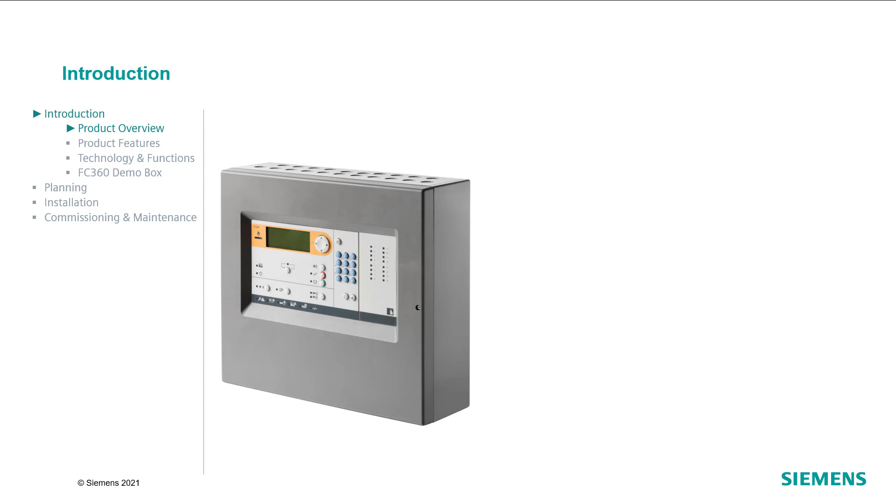The Cerberus Fit portfolio offers the earliest possible and most reliable detection and evacuation with clear voice messages. The commissioning as well as the operation of the fire panel are easy and can be performed without an extensive training. The Cerberus Fit portfolio offers several detector types for a wide range of applications, from standard rooms to harsh environments and sensitive zones. At the same time, it ensures business continuity.

The Cerberus Fit panel is available as FC361 standalone fire control panel with 1 loop or 2 stubs and can handle up to 126 devices. It comes with 3 relay outputs, 2 monitored sounder lines, and 4 freely configurable I/Os. There are 2 housing variants, Compact or Comfort.

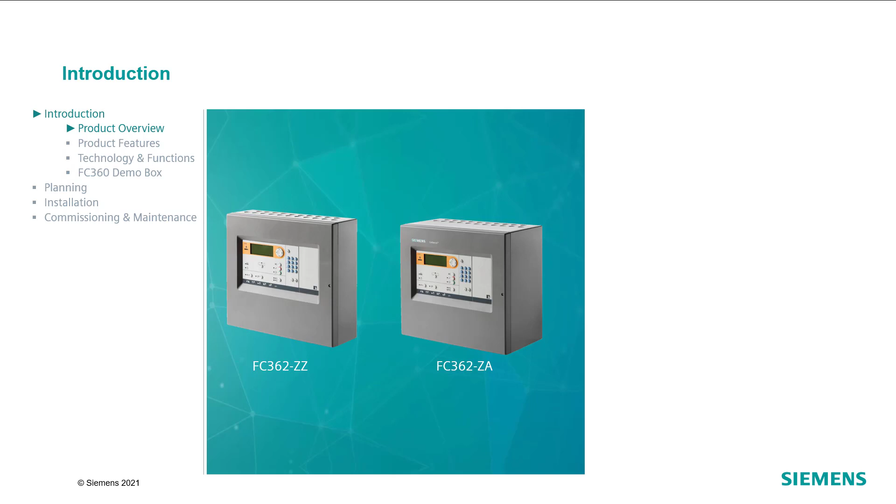The FC362 standalone fire control panel is suitable for customer sites with more devices and offers 2 loops or 4 stubs and up to 252 devices. It also comes with 3 relay outputs, 2 monitored sounder lines, and 4 freely configurable I/Os. It is also available in the Compact or Comfort housing.

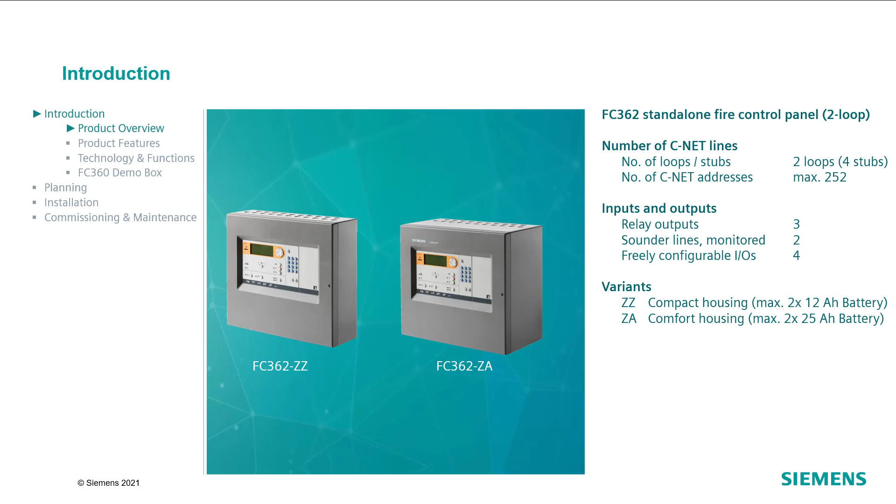The panel functions can be extended with the following accessories. The 32 zones LED indicator fits into the operation terminal of the fire panel. It indicates immediately which zone is in alarm state. The evacuation module NL provides a special Dutch function. It activates all alarm devices by pressing the start button twice and deactivates these devices by pressing the stop button twice. The key switch and key switch Nordic are used to log into the panel with access level 2 by using a key.

The output card 4M offers 4 monitored outputs which can be used for remote transmission or conventional sounder lines. 24-volt power is required and can be provided either by the internal power supply or by an external power supply. The FCA 2001 RS232 module can be added to connect an event printer. Another option, instead of the RS232 module, is the RS485 module FCA 2002 for the connection of an ESPA interface and a danger management system. The external printer, Fujitsu DL3750 Plus, can be connected to the RS232 module to print out all events from the panel.

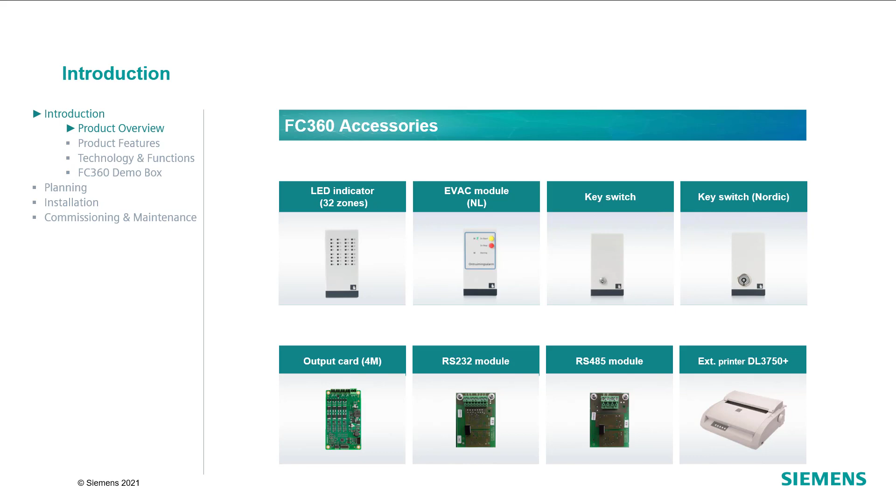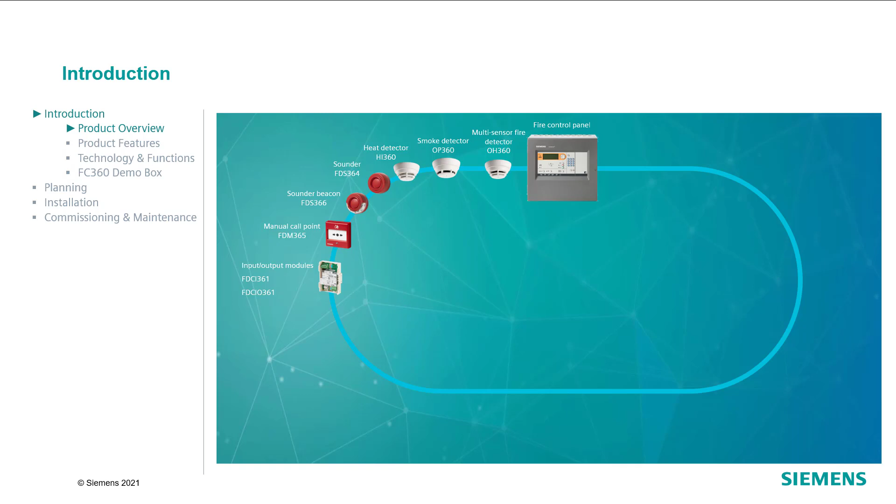Next, we would like to show you an overview of all the devices that can be connected to the Cerberus Fit panel. All loop devices are addressable and are equipped with an integrated loop isolator. The Cerberus Fit devices are designed for basic standard applications and include a multi-sensor fire detector, a smoke detector, a heat detector, a sounder and a sounder beacon, a manual call point, and 2 different types of I/O modules. All Cerberus Fit devices are pre-configured and easy to commission.

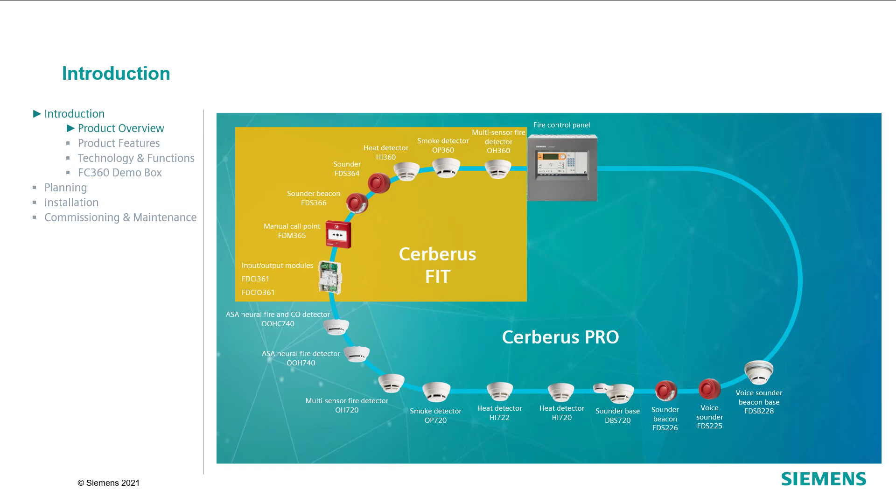For more complex applications, it is recommended to use the Cerberus Pro detector family. This detector family includes a Neural ASA fire and CO detector. ASA stands for Advanced Signal Analysis. It also includes a Neural ASA fire detector, a multi-sensor fire detector, a smoke detector, and 2 heat detectors. The portfolio offers a wide range of loop-powered alarm devices and voice sounders, different types of manual call points, linear smoke detectors, flame detectors, and loop-powered floor repeaters that can be operated anywhere on the CNET, either with or without buttons. Last but not least, there are various types of input and output modules.

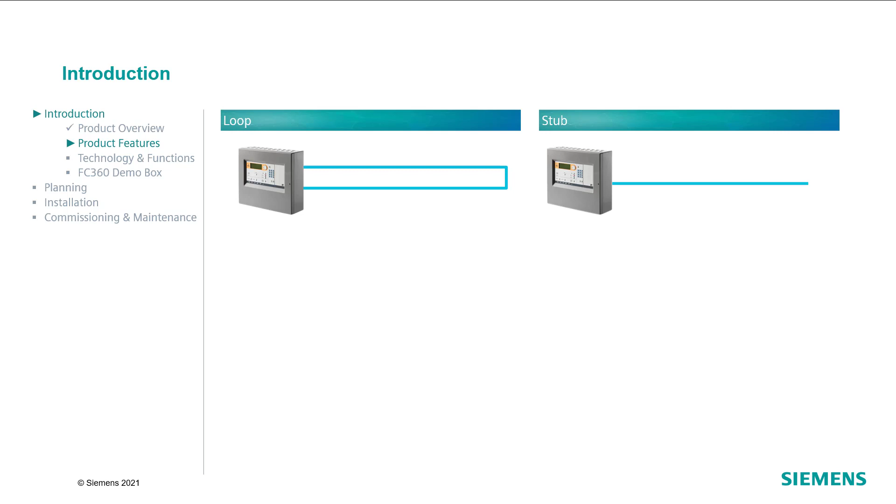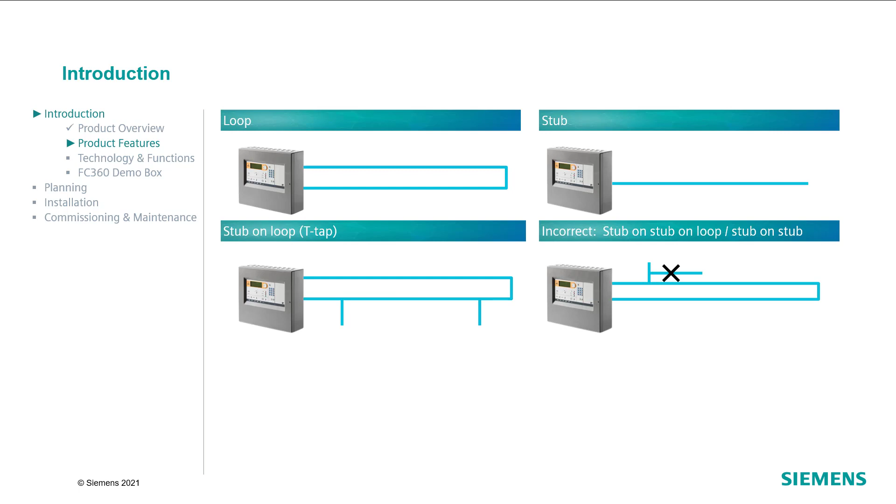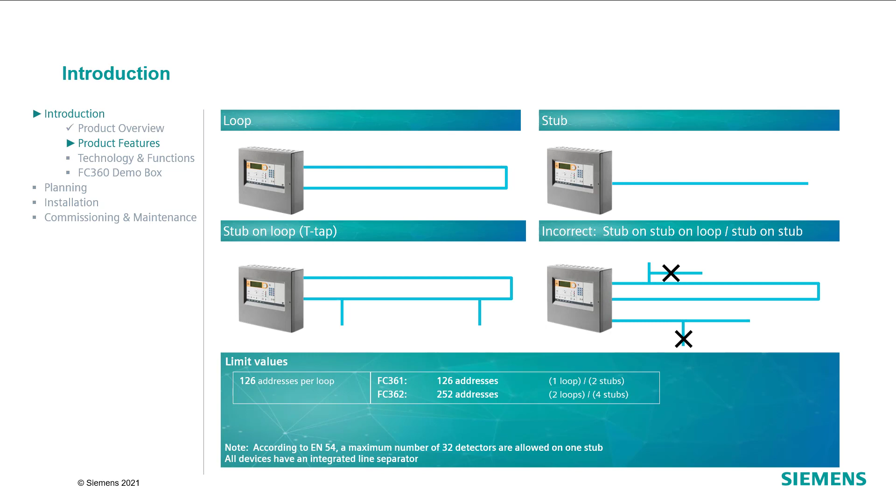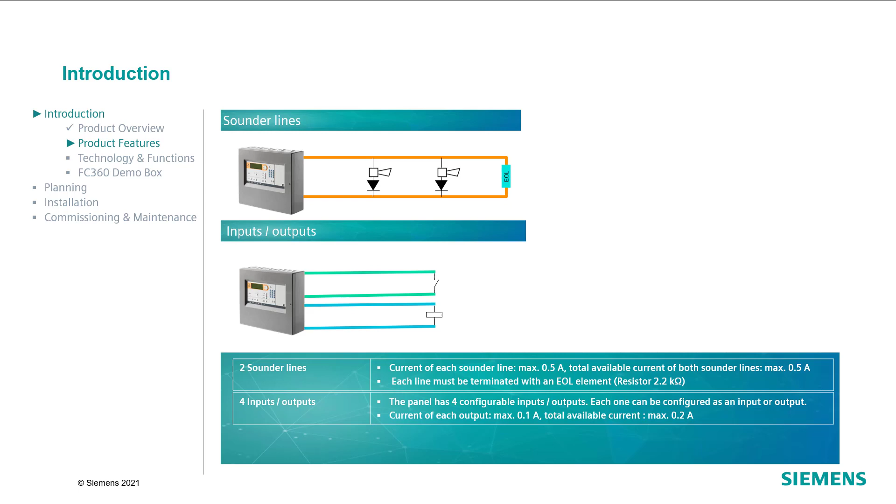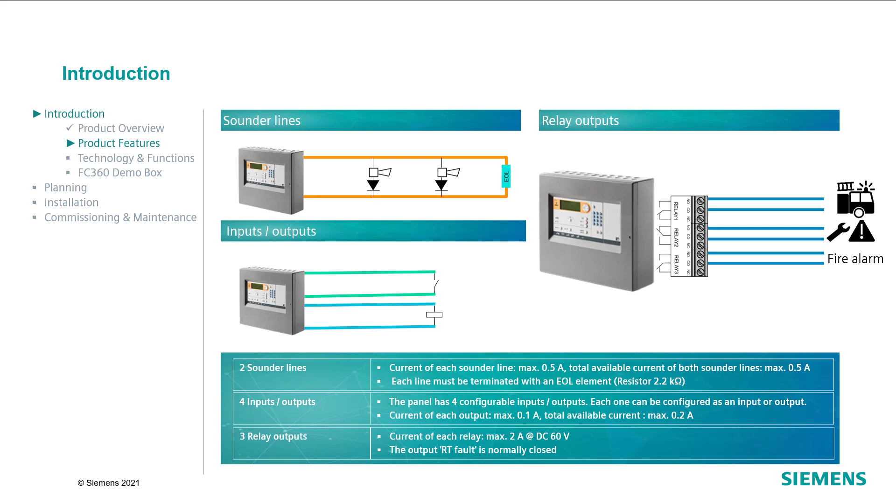Wherever they are used, in office blocks, hospitals or hotels, Cerberus FIT automatic detectors protect people and assets. The following detectors are available for those applications: the optical smoke detector with a high-quality measuring chamber and intelligent signal processing, and the heat detector, which is a rate of rise detector that detects rapid temperature increases. This detector type can be configured for the detection of 60-degree static.

The multi-sensor smoke detector has an optical component and a heat sensor. The intelligent combination of optical and thermal signals makes the detector particularly accurate and reliable.

The Cerberus Pro automatic detector range can also be used for applications like offices, hotels and hospitals. In comparison with the Cerberus FIT devices, the Cerberus Pro detectors offer switchable parameter sets which can be selected in the commissioning tool. The optical smoke detector has a high-quality measuring chamber and intelligent signal processing.

The first heat detector is a rate of rise detector, detecting rapid temperature increases. The second heat detector is additionally equipped with a heat sensor and detects when the temperature reaches 60 degrees Celsius. The multi-sensor smoke detector has an optical component and a heat sensor. The intelligent combination of optical and thermal signals makes the detector accurate and reliable.

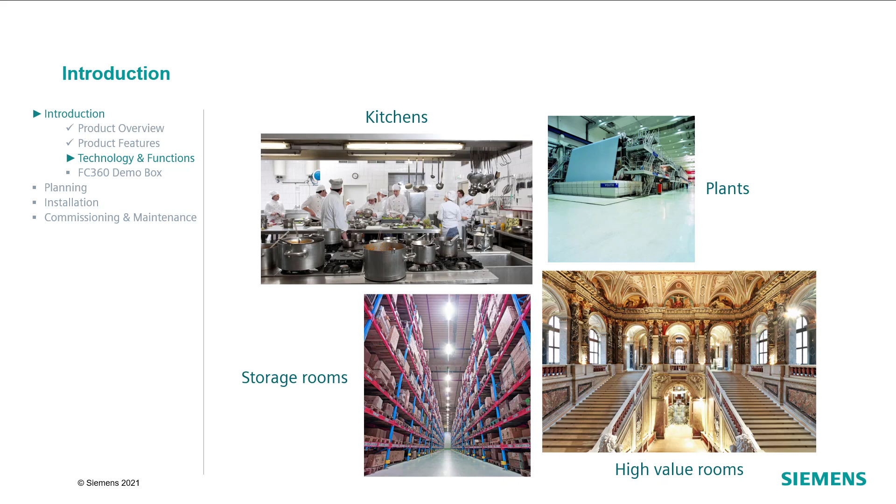Detectors with ASA technology are particularly suited for harsh environments like kitchens and plants or sensitive areas like storage rooms and high-value rooms. The ASA fire detectors are equipped with 2 heat sensors and dual optics with a variety of specialized parameter sets. This, combined with the fact that the optical and heat signals are intelligently linked, means that these detectors can detect signals accurately and are more unlikely to be tricked by deceptive phenomena.

The ASA fire detectors are additionally equipped with a carbon monoxide sensor, which means they can detect and intelligently evaluate 3 fire phenomena. As a result, alarms are activated very quickly and reliably, and the detector will hardly ever be tricked into setting off false alarms, even in environments with confusing phenomena.

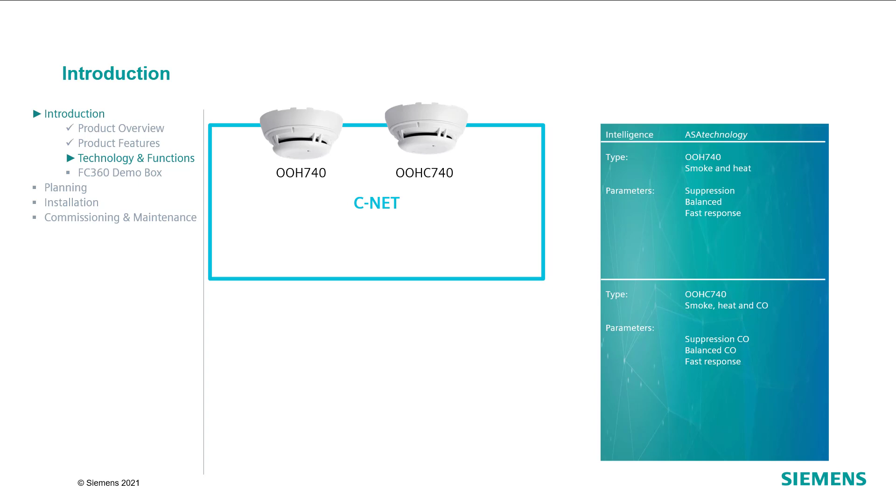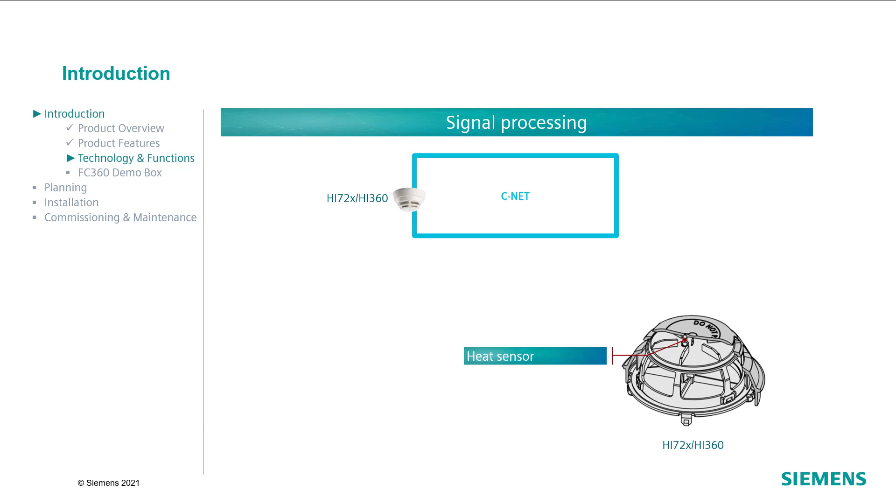You are now familiar with the different detector types. Let's now take a look at the hardware design and the structure of the detectors. The heat detector ranges HI72X and HI360 are equipped with one heat sensor. The optical detectors OP720 and OP360 have a light source, a light receiver, and a smoke labyrinth. The OH720 and OH360 combine both heat detection and optical detection in one detector.

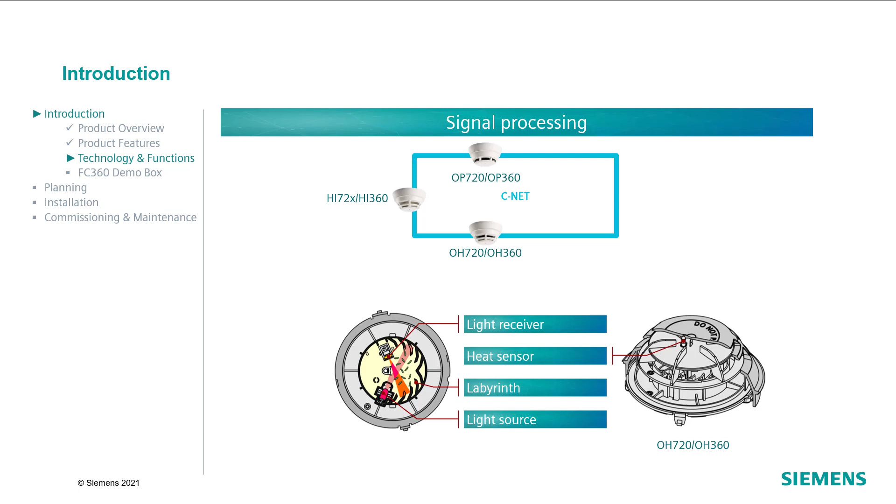The OOH740 comes with two heat sensors, one forward scatterer, one backward scatterer, and a light receiver. Last but not least, the OOHC740 detector combines heat detection and optical detection and also includes a CO sensor for detecting carbon monoxide.

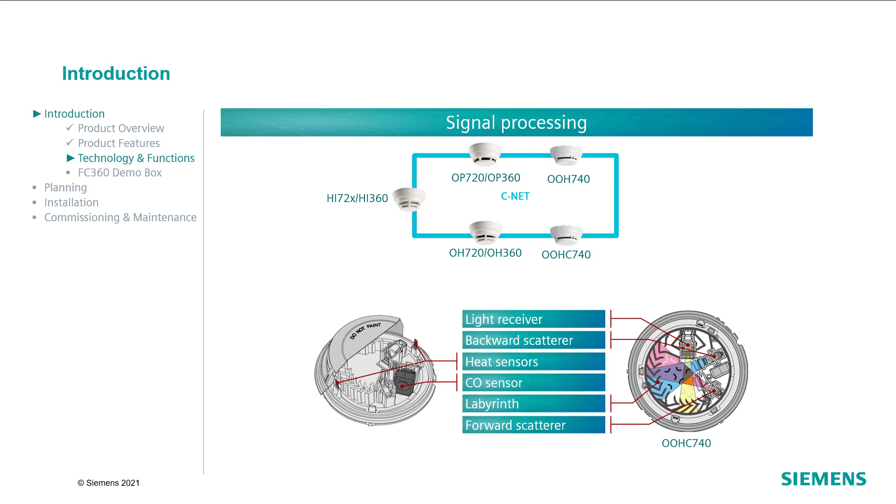Now that you have learned what each of these detectors contains, we will move on to signal processing. The following overview highlights the differences between different detection methods. The first method involves the detection algorithms for the indicated detectors. The sensor measures the fire phenomena, reduces them to mathematical components, and calculates them to the programmed algorithms.

The second method also involves the detection algorithms for the indicated detectors. The sensor measures the fire phenomena, reduces them to mathematical components, and calculates them to the programmed algorithms. These algorithms can be influenced by the choice of parameter sets depending on the ambient conditions.

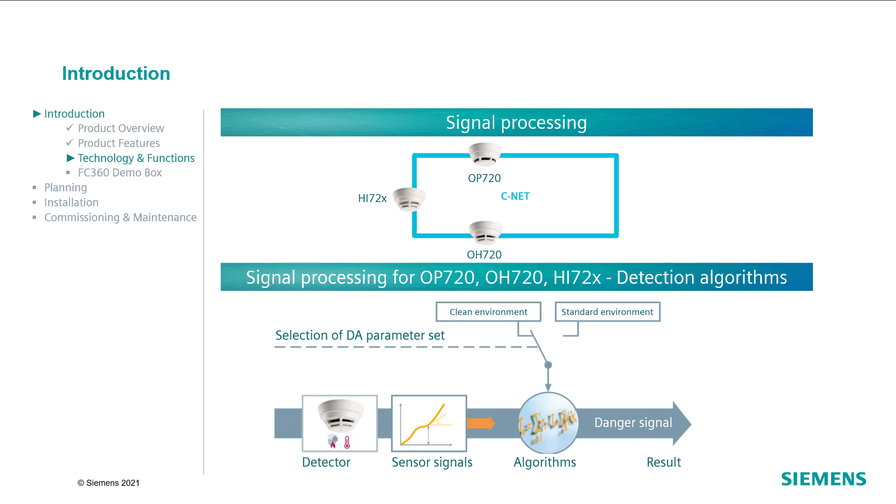The third method involves ASA technology. It represents the next step in algorithm technology. In contrast to the detection algorithms, selected parameters in ASA technology are not fixed. The situation variables are interpreted in real time, which has a dynamic impact on the selected ASA parameter set. This means that the detector's most effective range is adjusted automatically, allowing it to be more sensitive to fires, but less easily tricked by deceptive stimuli.

Next, we would like to show you an overview of the accessories for detectors. The detector base can be used for all point detectors. The detector base seal is used for installing detectors in humid rooms. Its protection category is IP42. The designation plate is used to state the device address.

The base attachment wet helps to mount detectors in humid or wet environments and also works when the detector heating is used. Its protection category is IP44. The protection cage can be used for mechanical protection, but only in conjunction with the base attachment wet. The detector locking device provides a grub screw which fits in a special hole in the detector housing. A hexagonal wrench for mounting is included.

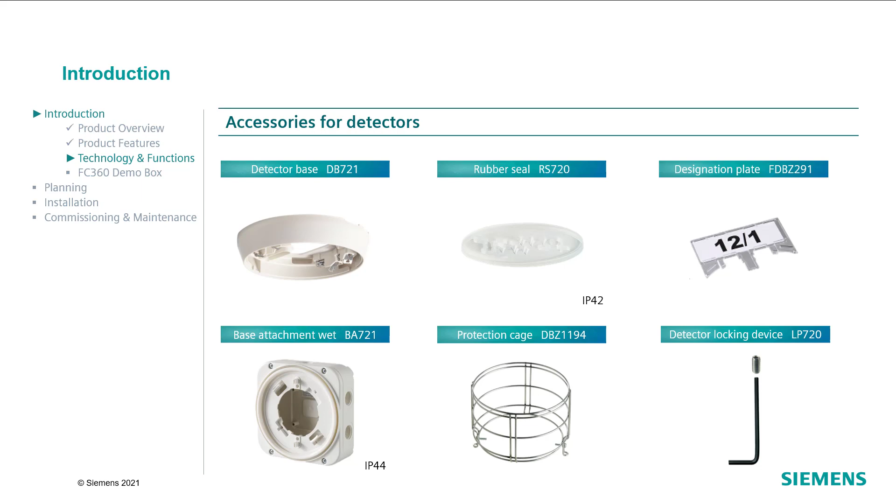The portfolio offers a wide range of manual call points that use both direct and indirect operation. First, we will look at the call points in the direct version. The standard manual call point with built-in alarm indicator is available in different colors. All parts of this product have to be ordered separately.

The second standard manual call point also has a built-in alarm indicator with a resettable plastic insert. This detector type is an all-in-one product order. The manual call point in a large housing has a built-in alarm indicator as well, but it can also use an external alarm indicator. It is available in different colors.

In addition to the large housing, the manual call point is also available in heavy-duty housing for industrial applications. The flush mounting manual call point with a built-in alarm indicator has either a glass insert or a resettable plastic insert. The manual call point with a built-in alarm indicator for outdoor application comes either with a glass insert or a resettable plastic insert.

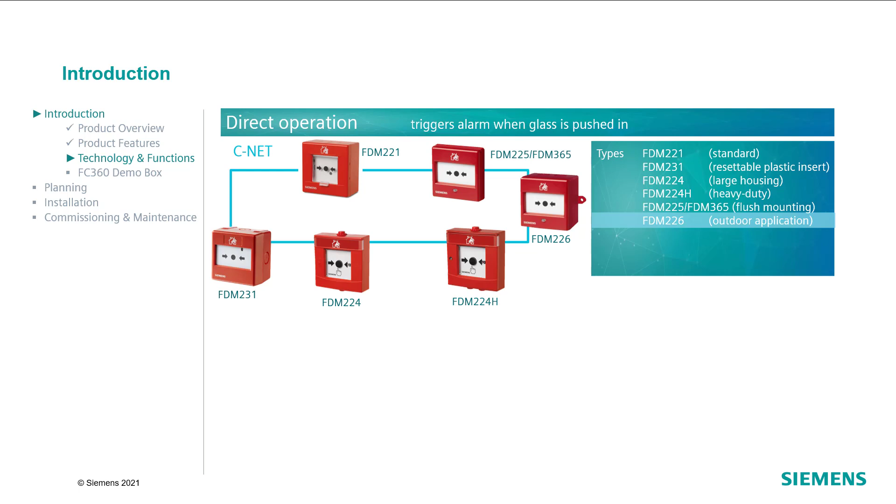Now, let's have a look at the call points in indirect operation. The manual call point in a large housing has a built-in alarm indicator, but it can also use an external one. It is available in different colors. The manual call point in a heavy-duty housing for industrial applications can be used with either a built-in alarm indicator

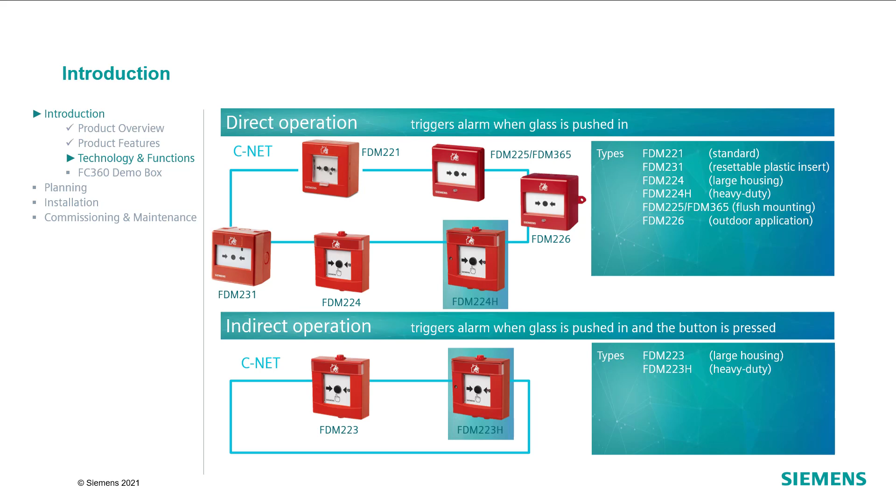or an external one. The large housings for these two manual call points are mechanically identical, but the switching unit is different. The heavy-duty housings have the same criteria as the large housings, which means they have different switching units but are mechanically identical. Finally, there's a manual call point in a heavy-duty housing for wet, humid and dusty areas.

The manual call point devices are available in different protection categories in accordance with IEC 60529. The small housing devices offer the fixed protection category IP44 or IP66 depending on the device type. The devices in large housings offer a basic protection category IP41 or IP44 depending on the housing type. By using a metal cable gland and the protection seal DMZ 1197-AD, the protection category can be raised to IP64 and IP66 depending on the housing type.

The Cerberus Fit product range also contains several alarm devices, including a sounder for wall mounting, a sounder base for ceiling mounting, a sounder beacon with a sounder beacon base, as well as a voice sounder beacon and a voice sounder beacon base. All devices are loop powered and are equipped with an integrated isolator. The wall-mounted sounder and voice sounder are available either in red or white.

The wall-mounted sounder beacon and voice sounder beacon are available in a red housing with a red LED, a red housing with a white LED, a white housing with a red LED, or in a white housing with a white LED. The ceiling-mounted sounder beacon base and voice sounder beacon base are available in a white housing with either a red LED or a white LED.

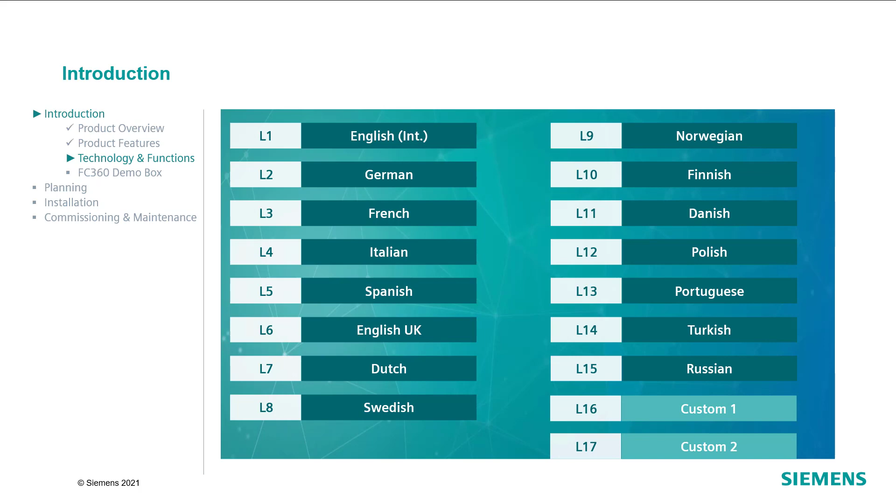It is also possible to have 2 custom voice messages. Which languages are available? Several languages are already included in the Cerberus Fit voice sounder devices. 2 custom languages can additionally be ordered. Cerberus Fit increases life safety by stimulating 2 senses. In the event of an incident, people who are hearing impaired, wearing headsets, or wearing ear protection won't be able to react to an acoustic alarm.

By stimulating 2 senses, the acoustic alarm and the optical alarm will attract attention more easily. In addition, the LED beacons on all optical alarm devices use a short pulse length. This makes the optical alarm signal even more effective. Voice alarm messages shorten reaction times.

In an unfamiliar environment, like a public building or hotel, guests need clear and easy to understand instructions in order to be safely evacuated. Making instructions clear is especially important in international environments with people of many different nationalities, as it speeds up the evacuation process. Evacuation messages can be programmed and customized to play in 2 languages so that the alarm is more effective.

Cerberus Fit voice sounder devices can be programmed to play a sequence of consecutive information in different languages. Let's listen to an example of a fire evacuation message, which has an attention-grabbing tone. The sequence starts with an evacuation tone.

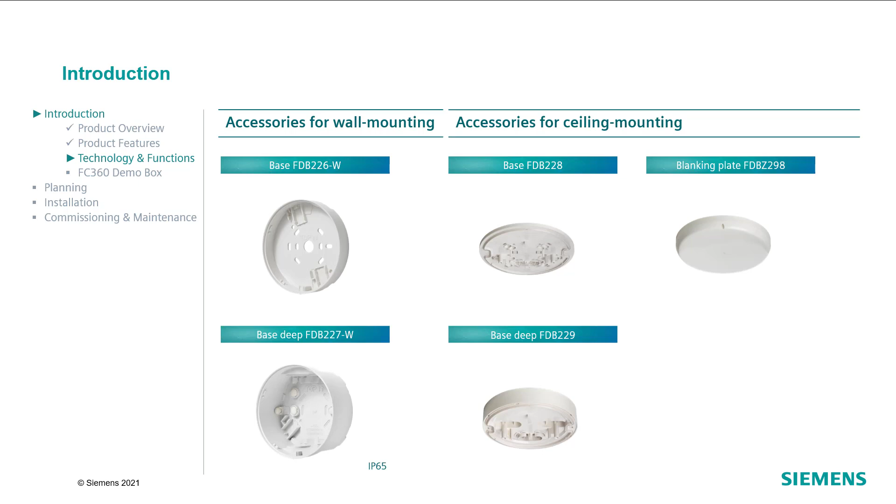For ceiling-mounted devices, a flat base is also available. It is used to thread the cable through the base bottom. There is also a deep base, which is used to thread the cable through the base bottom or through the side. A blanking plate must be used in case of standalone operation without a detector.

The external alarm indicators are connected to fire detectors in order to quickly indicate the source of an alarm signal from detectors which are not easily accessible or visible. It can be configured when the external alarm indicator is activated. It is possible to activate the external alarm indicator in parallel to the detector's internal alarm indicator by using a zone alarm or by multiple zones.

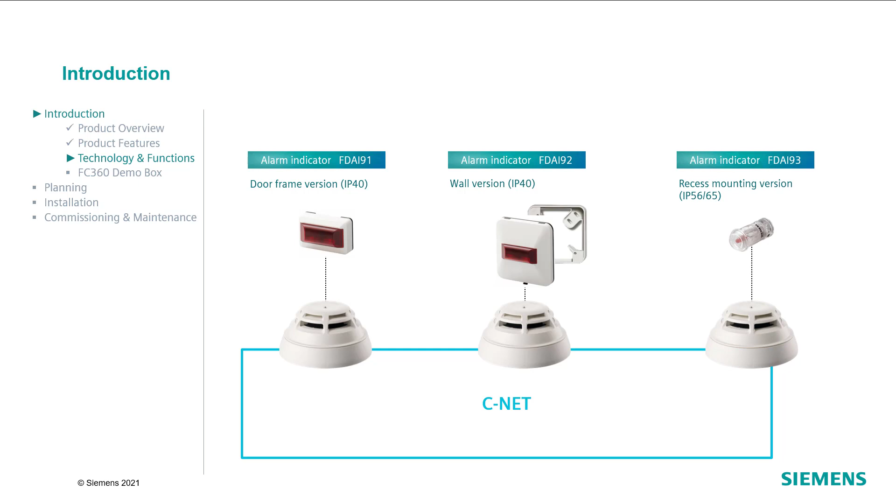The first type of alarm indicator is intended for mounting on door frames and other similar frames, or where space is at a premium. The second type is the wall-mounted version. A surface mounting frame is also available. The third type has been designed for recess mounting in panels or where there is not enough space to mount the other types.

The last type is the addressable alarm indicator. It is directly connected to the C-NET and has its own C-NET address. It is freely configurable when this alarm indicator should be activated.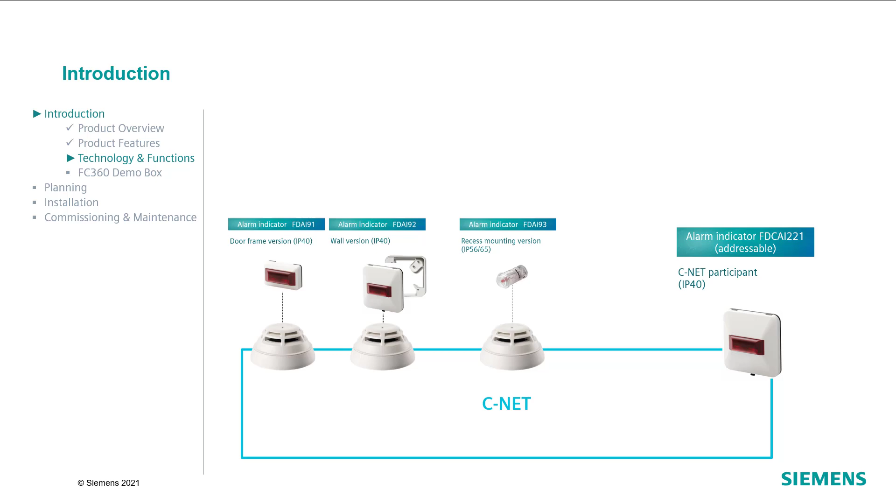The linear smoke detector is used for tracking distances between 8 and 100 meters. They are generally used in very tall rooms or historic buildings where point-type detectors are not wanted for aesthetic reasons. Various applications can be covered. In order to simplify the installation, no cable is necessary between the detector and the reflector.

The flame detector measures radiation energy in the infrared range. The detector is suitable for detecting smokeless liquids and gas fires, as well as smoke-generating open fires. The device includes 2 additional sensors that measure the radiation from interference sources, such as warm radiators, and from light sources, such as the sun.

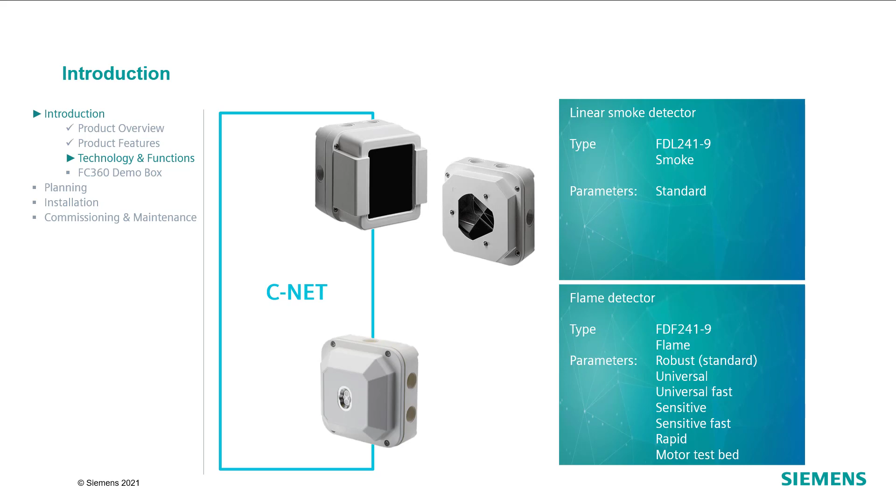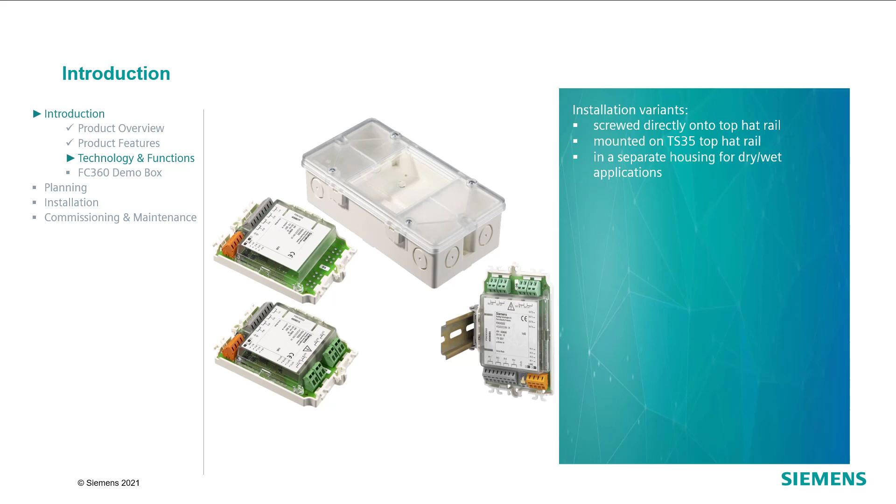The input and output modules are C-NET devices and can be freely configured for any purpose. They can be mounted in different ways, such as screwed directly onto a top hat rail, mounted on a TS35 top hat rail, or in a separate housing for wet and dry applications. The portfolio offers a wide range of modules.

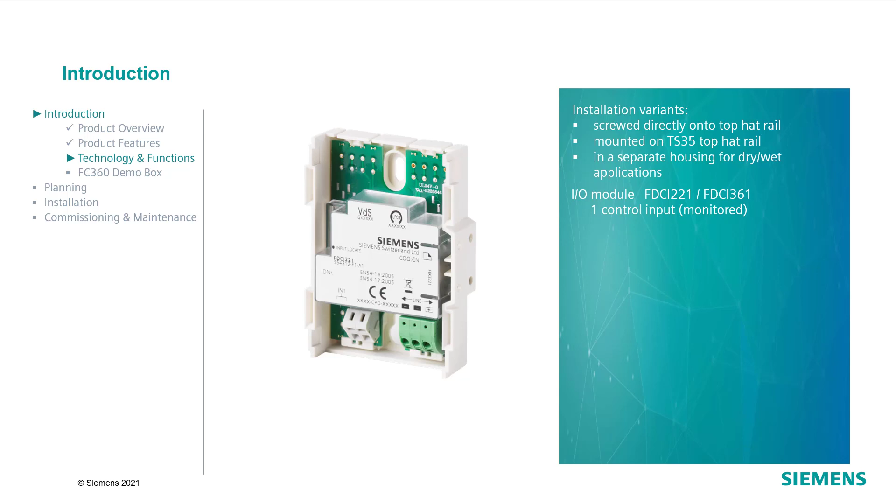There are 2 input modules with 1 monitored input that can be freely configured. Moreover, there are 2 I/O modules with 1 control output, that means a potential-free relay contact, and 1 monitored input. The input and output are freely configurable. Additionally, the output can be used as a monitored output, but an external power supply is required for this application.

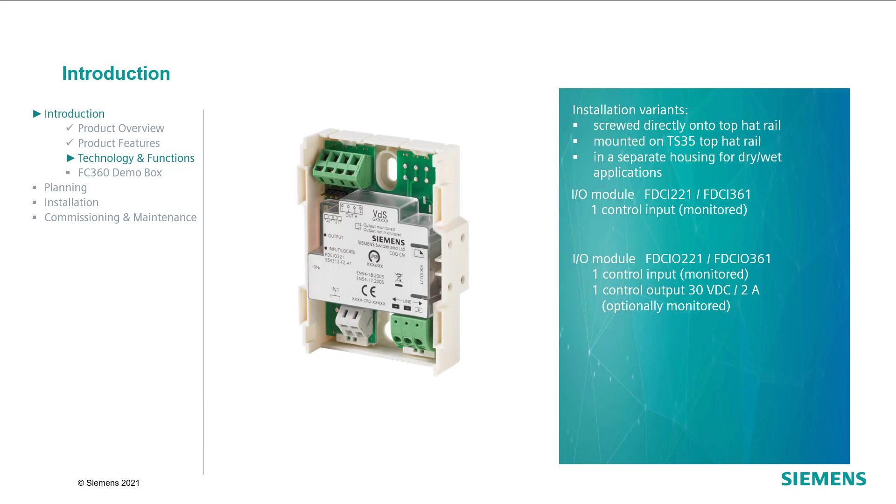There is also an input module with 4 freely configurable monitored inputs. Finally, there is an I/O module with 4 control outputs, that means potential-free relay contacts, and 4 monitored inputs. Each individual input and output is freely configurable. All I/O modules are powered via C-NET.

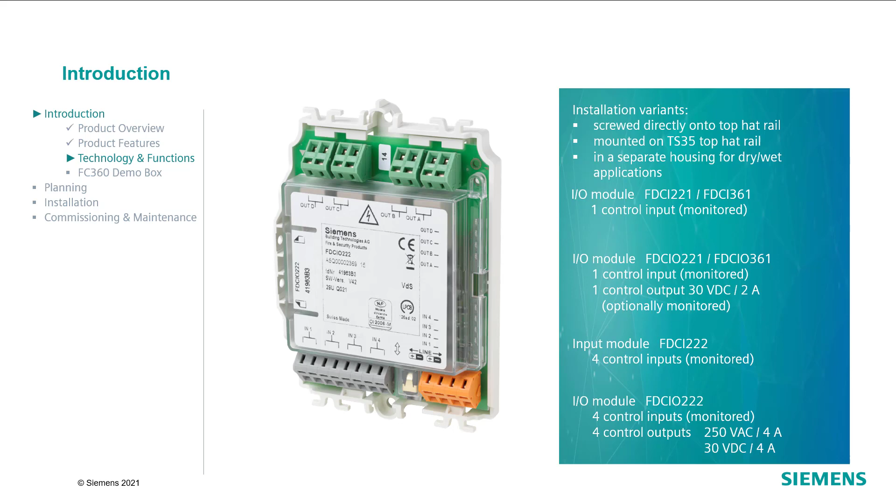The transponder modules are also part of the I/O modules on the C-NET. The transponder module offers 1 control input. It can be configured either as a collective conventional detector line or as a conventional EX detector line with the EX barrier SB3. The module must be powered by an external power supply.

Please keep the following in mind. In order to safeguard the device, the 24-volt power supply must be protected with a fuse of maximum 2 AT. The control lines can be operated either with two 1 ampere lines or one 1.5 ampere line protected with separate fuses. The device contains internal fuses up to 0.7 AT.

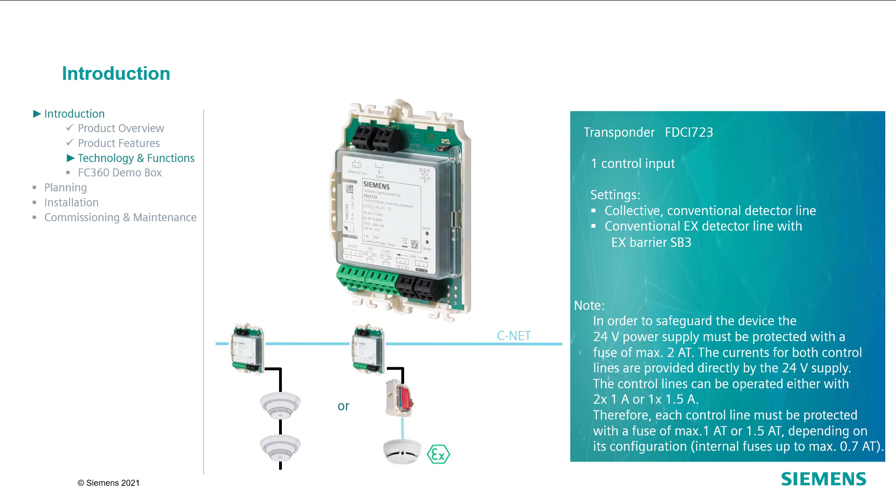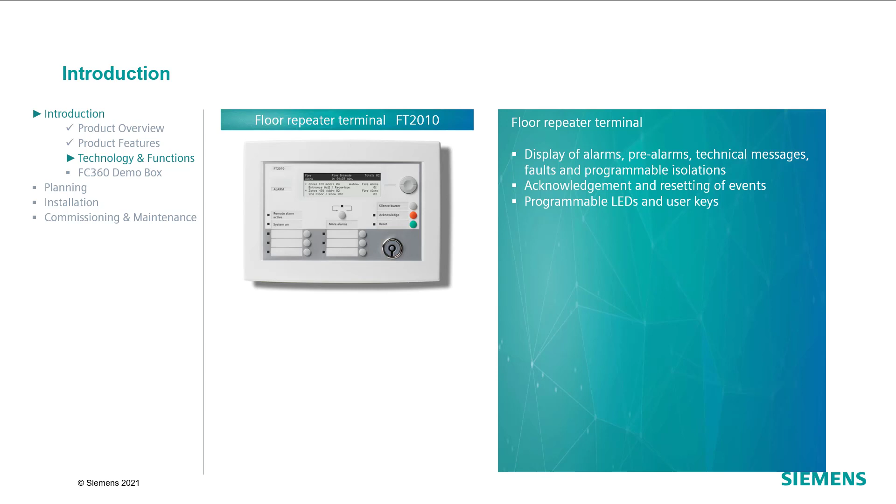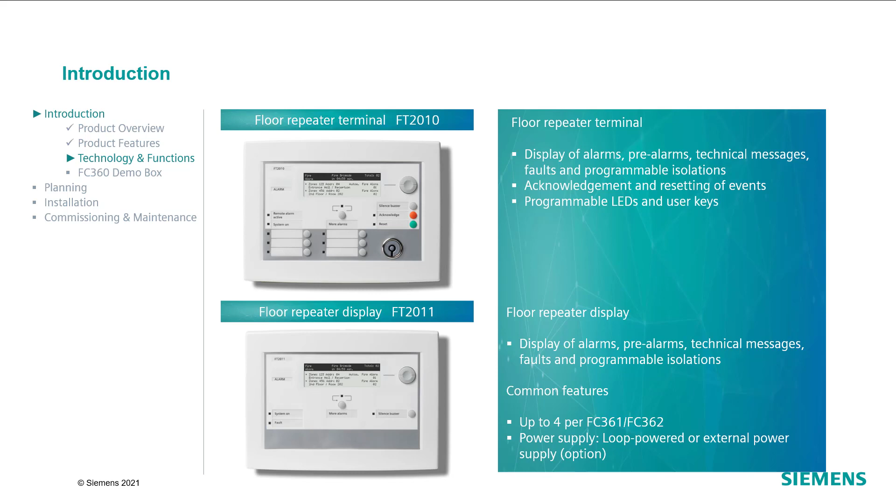Now let's have a look at the floor repeater terminals and floor repeater displays. The floor repeater terminal is used to simplify displaying and operating the fire protection system across the coverage area. It is part of the C-NET and can be supplied via the loop or by using an external source. The visibility, user keys, and 6 LEDs can be configured according to customer needs. The floor repeater display is used to display messages from the coverage area. It is either loop powered or supplied externally. The visibility can be configured as well.

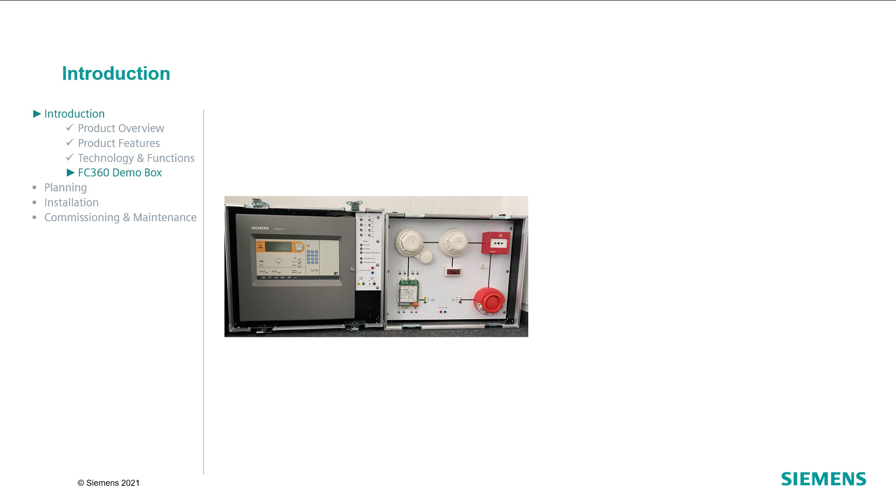The new FC360 demo box offers the possibility of demonstrating Cerberus Fit anywhere at any time. It visualizes the functionality and the customer gets a feeling for the reliability and benefits of Cerberus Fit. You can show all functions and USPs on exhibitions, customer visits and events, sales conversations, or use it in your showrooms and also for trainings.

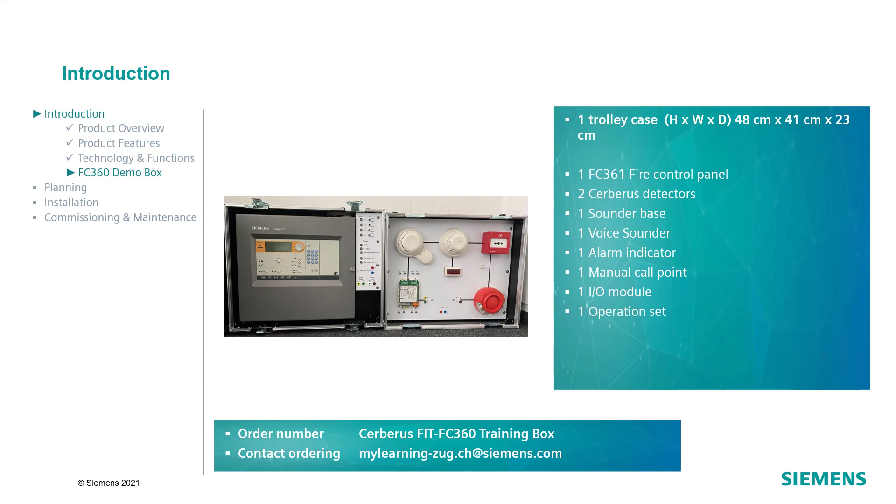In the next lesson, we will explain the planning process of a Cerberus Fit system.